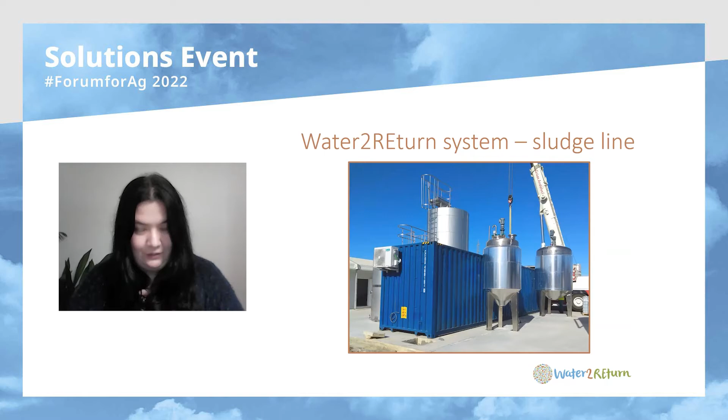This is the water line, the SVR, and the other different parts of the system, the filtration unit. Then here we have the fermentation unit, sludge line. And then here we have the energy recovery module with the anaerobic digester. And finally, as I was mentioning before, the algae line.

So just to finalize this presentation, which could be the potential clients for this project? We have two very differentiated sectors. On the one hand, those regarding the production of wastewater, which are in principle the slaughterhouse industry that would be the early adopters, because we have already been testing it in a slaughterhouse, and also the meat processing industry, because the wastewater is quite similar to the one from the slaughterhouses. Concentrations are not the same, obviously, but the kind of water is not so different.

And on the other hand, regarding agriculture, we have the agronomic products distributors and the agricultural sector, the farmers. As mentioned, it's a modular system to be tailored for further clients according to their needs and expectations. This means we do not have to install all lines in all cases. It depends on what the end user needs and expects. And it's highly replicable, because I was mentioning first the slaughtering industry and the meat processing industry, but it's flexible to be adapted to other food industries.

So that's all from my side.

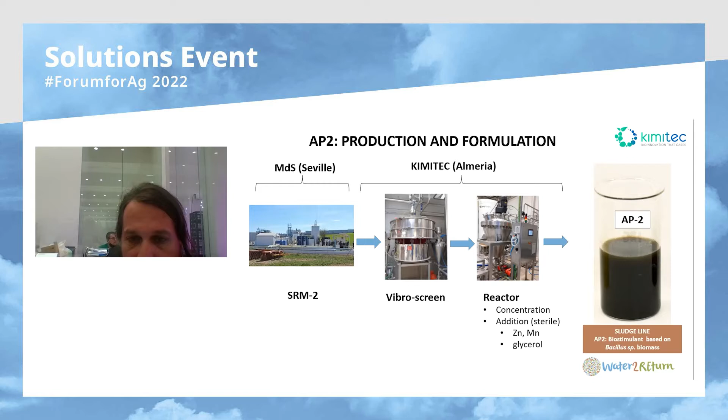And also with AP3, we follow a similar scheme. In this case, because of the size of the microalgae pool, what we do is send glycerol to them. Glycerol is going to reduce the water activity, which is a way to reduce the possibility of contamination. And we send IBCs - this is an IBC, this kind of container - filled with 300 kilograms of glycerol, in order to be completely filled with microalgae biomass.

Then we send this IBC already full to our facilities, and over there we screen it and pass all this biomass through a homogenizer in order to break down the cells and release the organic material inside these cells.

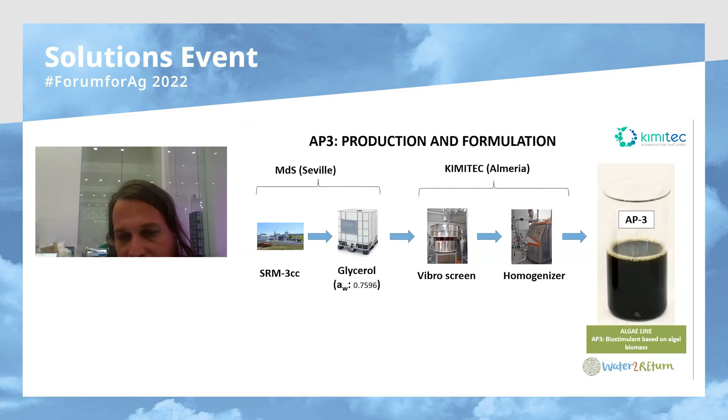So here you can see some tests we did. At the very beginning, what we did was some kind of scouting. We gave very close farmers 10 or 20 liters to try it with different crops and in different situations, with the idea to get feedback, because at the beginning we didn't know what we could use it for. Maybe for seed germination, for increasing the sugar in melon, for example, or we didn't know what to expect from this product.

So we sent a lot of samples to many close friend farmers, and we got some feedback.

Here you can see a test in which we try, in this case, AP2 against some control. In this case, Agrobiotic, which is a product of our company, Kimitec. And as you can see, in the commercial unit figure, product AP2 has a biostimulant activity, but it's not as good as our product Agrobiotic.

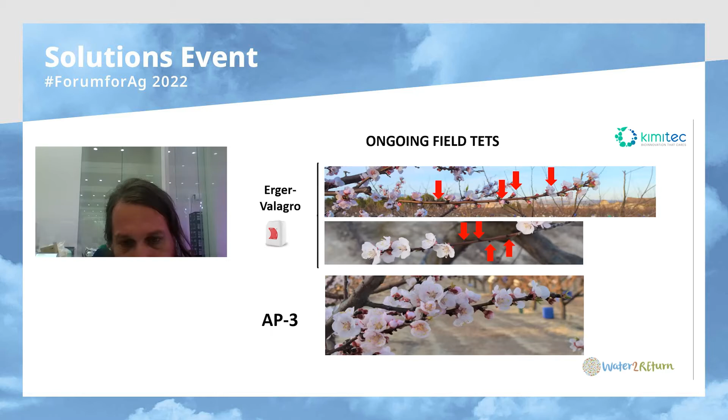If you get a more homogeneous fruit setting and flowering, you will get a more homogeneous production, and then you have to get into the field just once for manual picking. Here you can see another test, and in this figure you can see how our product AP3, at two different concentrations, increases the flowering activity and the fruit setting compared to the control.

I'm sorry if you are hearing a sound, it is raining a lot, and it was not planned to rain so much. Sorry.

And you can see our product AP3 is competitive with the chemical control. It's much better than the organic product from the competition, and it's competitive, even better than the chemical control. So that is it.

Thank you very much, David, for your presentation. We were able to hear you very clearly, despite the sound you mentioned in the background. But yes, thank you, it's always good to see the scientific side of things and the actual results.

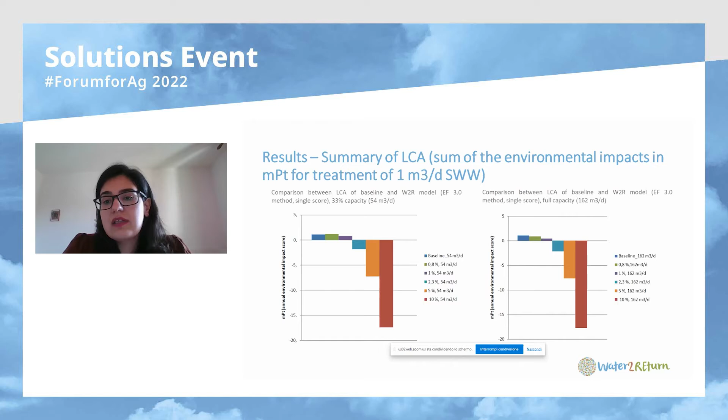And if we even increase this amount - 2.3, 5, 10% - we are really beneficial in terms of environmental impacts. On the right side, when we implement the same reduction percentages on chemical fertilizer consumption, we see very similar trends: first one representing baseline, second is the breaking point, we can think of them as catching each other. 1% reduction is already beneficial, and more than 1% it is extremely beneficial.

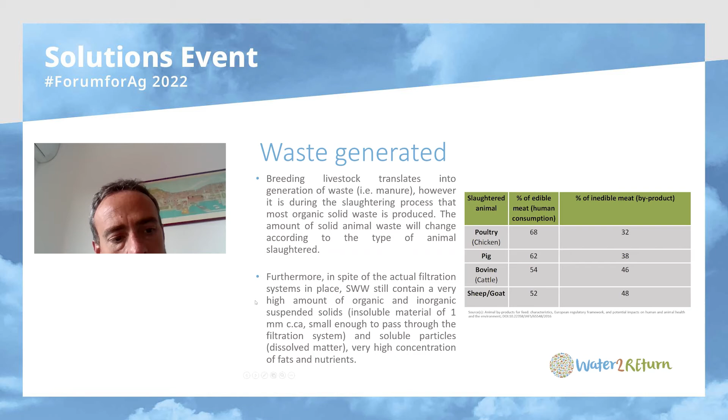If we focus our attention on the regulatory aspects, we have focused our attention on the Water Framework Directive, the Sludge Directive, and the EU Biodiversity for 2030 Directive, in order to develop a solution that in any case is aligned with the actual and future legislative framework defined by the European Commission.

About the first one, the Water Framework Directive is a European directive which requires European Union member states to achieve good quality and quantitative status of all water bodies. It stipulates that groundwater must achieve good quantitative status and good chemical status. As this document was written 20 years ago, Water2REturn far exceeds the requirements of this directive.

If we focus on the Sludge Directive, it was adopted 30 years ago, and the new directive is being written with both the needs of the environment as well as the needs of farmers in mind. Over 65 organizations, including Copa-Cogeca and Fertilizers Europe, have given feedback. The Water2REturn system fulfills the requirements of the previous Sludge Directive and should fulfill the upcoming directive.

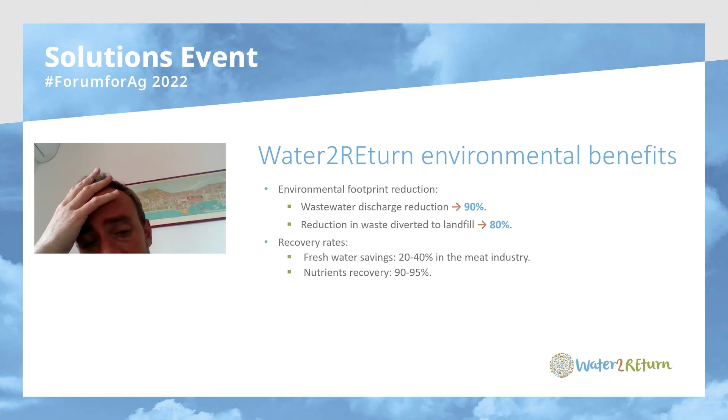In terms of recovery rates, we have freshwater savings of between 20 and 40% in the meat industry, which is an important result we have achieved, and we have nutrient recovery between 90 and 95%. Just to give you an idea about the treatment cost, with the conventional solution the cost is

2.63 euros per cubic meter of water. With our system, we are able to decrease this cost to 1.85 euros per cubic meter, a cost saving of around 30%. Of course this is an average value and depends on the different conditions of the slaughterhouse.

In terms of business opportunity for the involved sector, there are new opportunities for wastewater treatment, energy engineering, and consultant companies. We have new products for manufacturers of biostimulants, and for sure new opportunities for slaughterhouses and the meat industry in general.

Who are our potential clients? The slaughterhouse industry are the early adopters, in particular the meat processing industry. On the other side, we have bioagronomic product distributors, and for the agriculture sector we have conventional and organic farms.

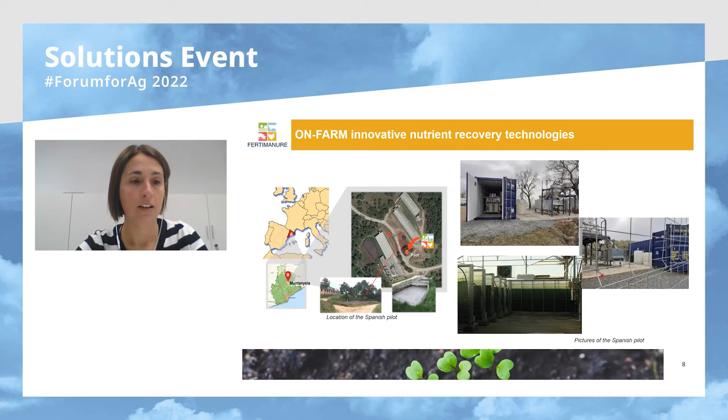The second pilot is located in the Netherlands, specifically at the Arjen Prinsen farm in the Achterhoek region. Arjen Prinsen is also a partner in our project, and in this pilot we have also involved Wageningen University and Research and Dorset Green Machines.

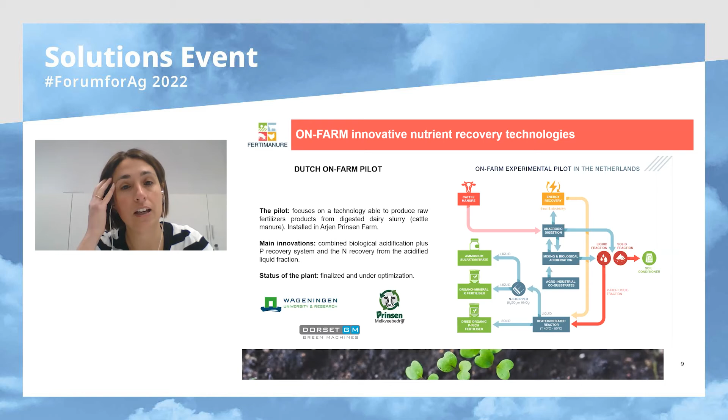This pilot is focused on the treatment of cattle manure, with a treatment capacity of 8 cubic meters per day. The main innovations are combining a biological acidification and phosphorus recovery system with nitrogen recovery from the acidified liquid fraction. This pilot, differently from the one in Spain, also includes anaerobic digestion.

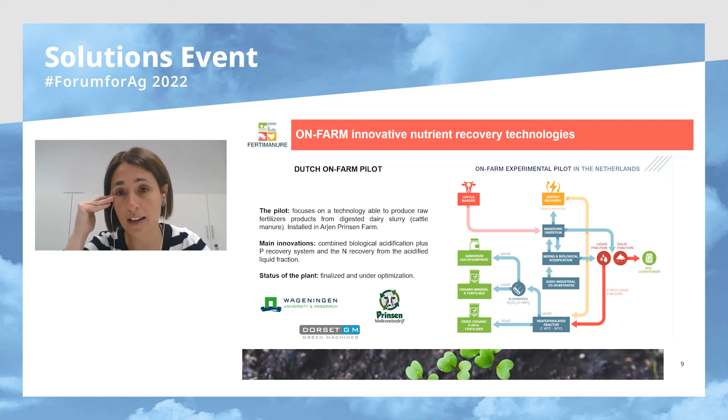Then we have the German on-farm pilot, located at the Fraunhofer facilities. Fraunhofer is the only partner involved in this pilot, which is aimed at valorizing cattle manure. The main innovations of the German pilot are the catalytic reforming of the manure with zeolite, a selective ammonium recovery directly from a thermocatalytic reforming gas stream, the phosphoric acid leaching of the thermocatalytic reforming biochar, and the exchange reaction to produce solid ammonium phosphate.

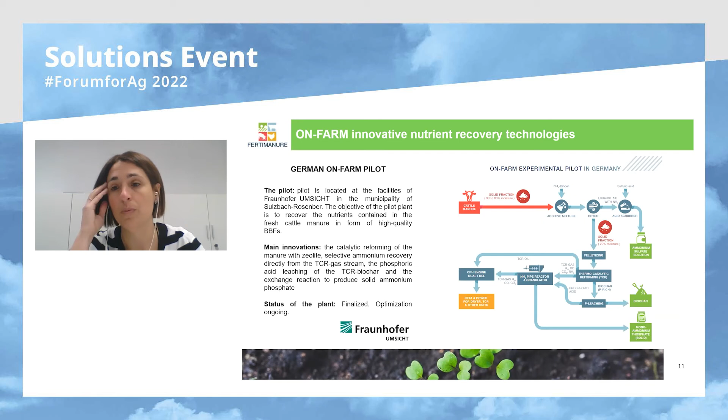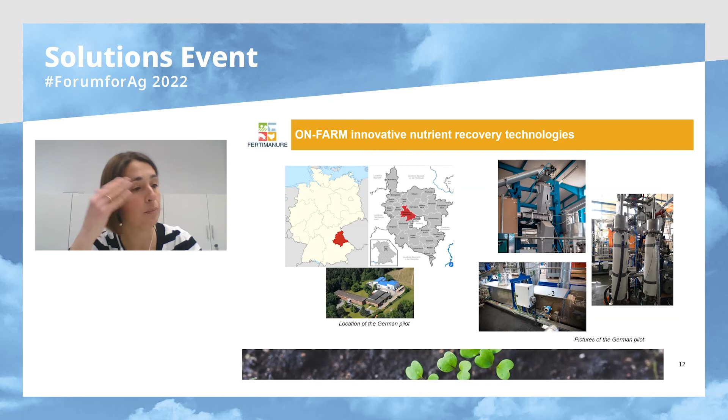In this pilot we are obtaining 3 different products: a solution of ammonium sulfate, the biochar, and the monoammonium phosphate, which is a solid product. Here is the location of the German pilot, and also some pictures of this pilot plant, which has a treatment capacity of around 3 cubic meters per day.

Here is the case of the Belgian on-farm pilot. The main partner involved is Ghent University, which is doing the follow-up of products obtained in different already existing plants in Belgium, although they are doing a more detailed analysis and balance of a pilot located at Detricon, on a farm that has 11,000 pigs.

The main innovations of the Belgian pilot are the secondary ammonium sources obtained from stripping and scrubbing technologies, used to recover ammonium fertilizers. This pilot is operational, but our Belgian partners will also be analyzing bio-based fertilizers obtained in other already existing pilots on different farms, to follow up on product quality and test these bio-based fertilizers obtained in this case from pig slurry.

Here is the location of this Detricon plant that will be followed in more detail, and also some pictures of this Belgian pilot.

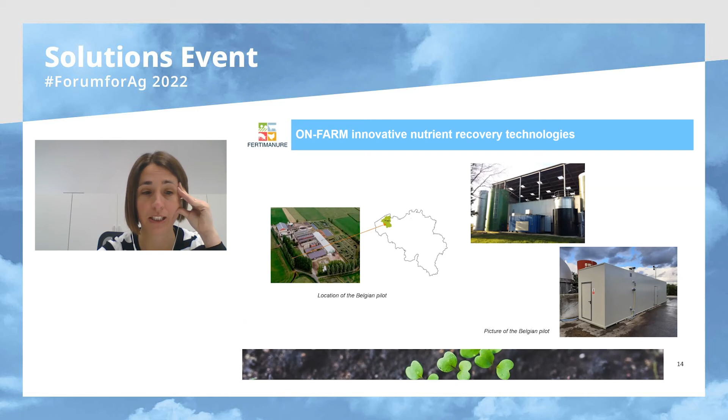And the last one, the 5th pilot, is the one in France. In this case, the French pilot will run using on-farm mobile units. We have mobile pilots that have been built into trucks, and in this way we will be able to use them in different farms located in the Grand Est and Brittany French regions.

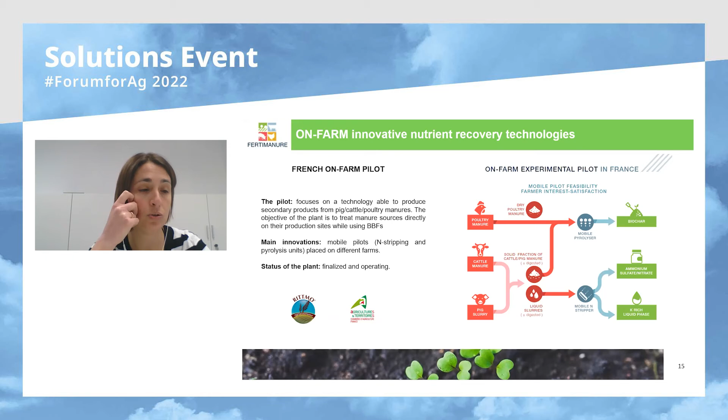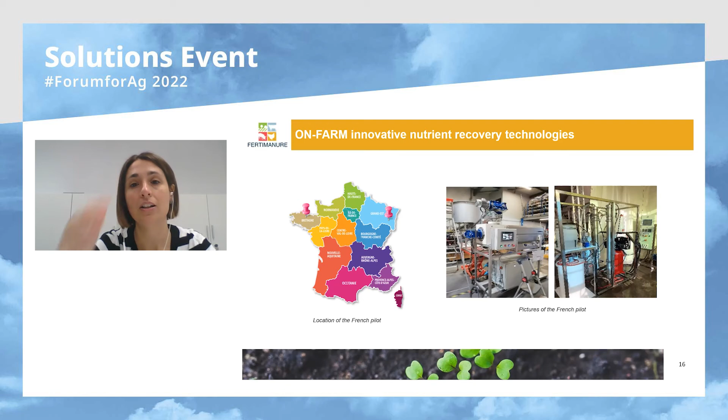As you can see, these are different approaches. We have 5 different pilots using completely different technologies with different approaches, treating different types of livestock waste. At the end, if we put together all the work done in the different on-farm pilots of the FertiManure project, we are obtaining a total of 19 bio-based fertilizers. As I said, the bio-based fertilizers are the products, the nutrients directly recovered from the pilots in the farms. Here you have the list of products that we are obtaining, and also some pictures of these products.

What we are doing with these products is to directly test them, but also we are using these products to formulate tailor-made fertilizers. So how are we working to obtain these tailor-made fertilizers? What we have done is to create the TMF Nutrition Tool. The TMF Nutrition Tool is an Excel tool that is aiming to be easily used by all the farmers and stakeholders that can be interested in formulating tailor-made fertilizers.

This tool is considering the sources that we are using to obtain the nutrients, so the manure fractions, also the nutrients that have been recovered from the different pilots, and other additives to formulate and to have the desired nutrient content. We are also considering the soil and crop requirements: which crop are we willing to use these fertilizers for, in which soil do we have these crops, and also possible legal restrictions of the region where this TMF will be applied, in order to have clear which are the limit nutrient contents of these products.

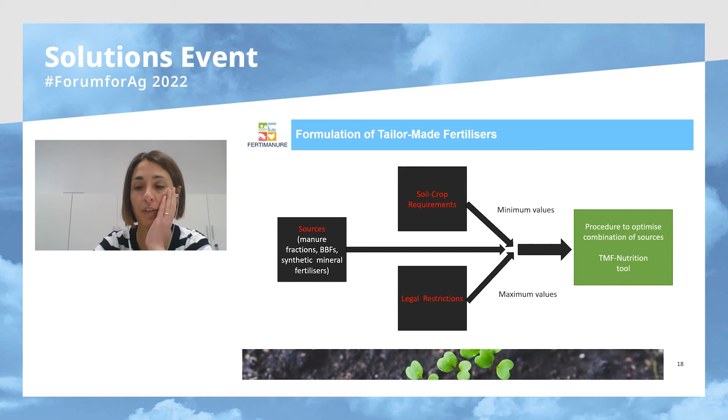Also, once we have the BBFs and the TMFs, what we are doing in the project is to test their agronomic performance and compare them with current mineral fertilizers that are currently used. We are doing tests in control conditions, at lab scale, where we are assessing nitrogen, phosphorus, and carbon dynamics of our products compared with the mineral fertilizers. Then we are also doing field trials to evaluate in a real scenario the performance of our products, and we will also be doing demonstration field sites and interactive events to show the stakeholders our products.

At the moment we are doing the field trials and the pot tests and incubation tests, and for the moment what we are seeing is that our products have the same quality, so no major differences are seen between using our products and the commercial ones. In terms of agronomic performance, for the moment the results are good, and we are obtaining no difference between our products and the commercial ones.

Another important thing will be to evaluate the sustainability of obtaining these products, implementing these technologies, and applying our products in the field. So we are doing a complete environmental, sustainability assessment, considering the environmental, economic, and social parts, following a cradle-to-grave approach, considering all that is done on the farm, in the production of tailor-made fertilizers, and in the application of these products. Thanks to this assessment, we will be able to tell the benefits of our process from an environmental, economic, and social point of view.

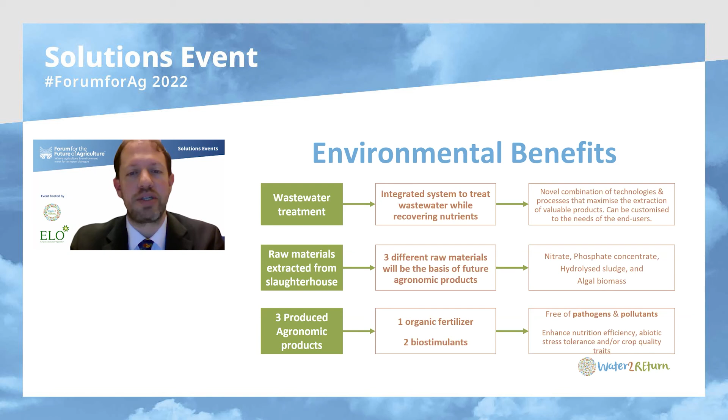These are the 3 agronomic products: 1 fertilizer and 2 biostimulants. The fertilizer is a soluble nitrogen and phosphorus product, which we call SRM1. The biostimulants are the hydrolyzed sludge, enhancing nutrient efficiency, abiotic stress tolerance, and crop quality traits, as well as algal biomass, SRM3, which is an algal-based biostimulant.

But most important are the environmental benefits of Water2REturn: these products are free of pathogens, heavy metals, and emerging pollutants. This gives safe reuse of slaughterhouse wastewater in the EU as well as abroad, if the product fertilizers are exported.

Also, as mentioned during the previous presentation by Marco, it's still inexpensive, still makes other fertilizers cheaper, and it's still in line with all existing legislation. And the final part of the presentation is the economic security.

As you've been seeing, the situation in Russia has jolted the fertilizer market. The Russian-Ukraine crisis ignites fertilizer prices at a critical time for world crops. CF Industries boosts U.S. fertilizer shipments as war cuts Russian exports. And of course, the Russian invasion of the country known as the breadbasket of Europe has exposed just how much the EU relies on Russian fertilizer and Ukrainian corn to feed its animals.

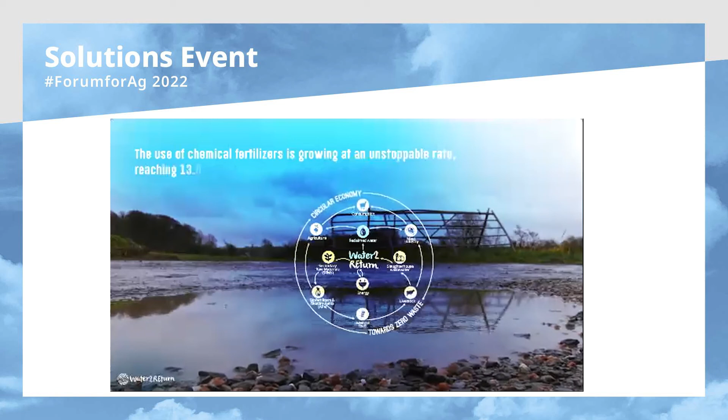The purpose of the Water2REturn project is the recovery and recycling of nutrients within the framework of circular economy, embodied in the implementation of an integrated solution for the treatment of wastewater from slaughterhouses, as well as the recovery of nutrients with a high market value in the agricultural sector. Industrial slaughterhouses are noted for a high consumption of water and energy, as well as for generating vast amounts of wastewater. These wastewaters contain a huge amount of nutrients, and the tendency is to treat them and dispose of them, instead of using methods for their recovery.

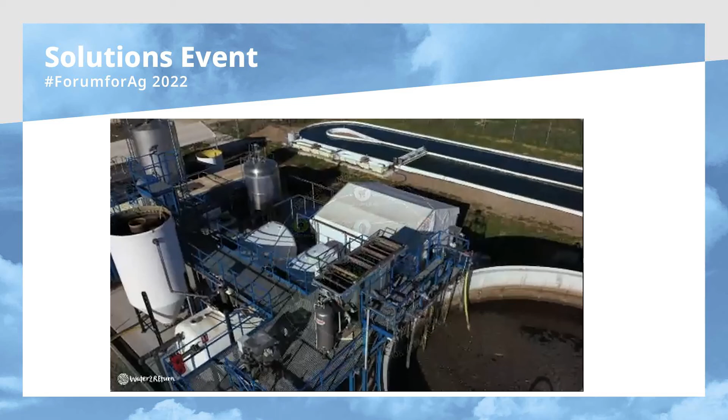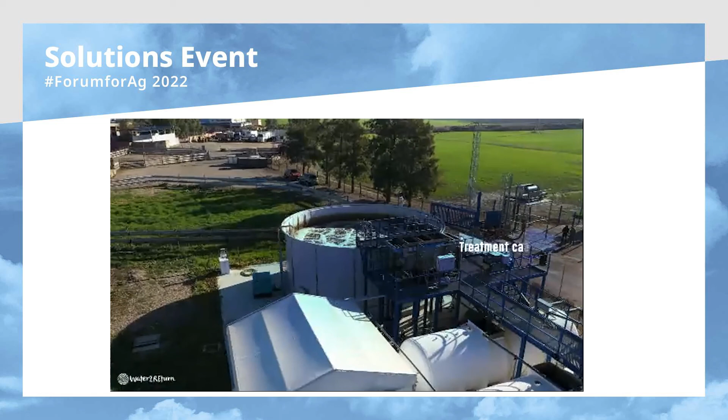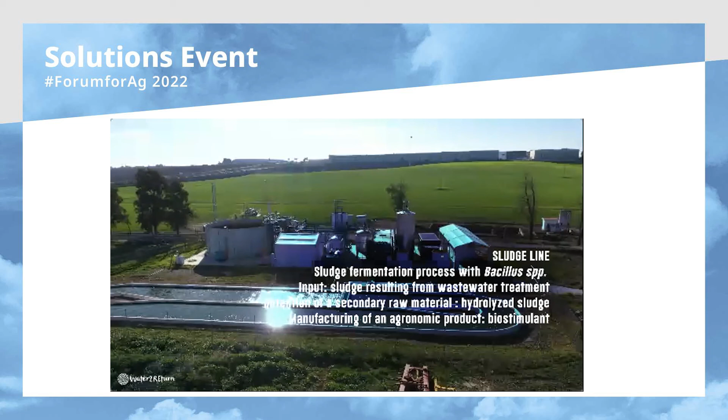On the other hand, the use of chemical fertilizers is ever increasing due to the need to feed a growing global population under limited availability of farming land, with all the ensuing environmental implications like eutrophication of masses of water. Water2REturn proposes an alternative, sustainable approach, a real technological breakthrough developed within the framework of a circular economy. Water2REturn is a system that allows wastewater from slaughterhouses to be treated whilst also recovering the nutrients, thus becoming secondary raw materials used to manufacture agronomic products, specifically fertilizer and two biostimulants. In addition, the system includes an energy recovery unit. Ultimately, slaughterhouse wastewater treatment facilities become biorefineries.

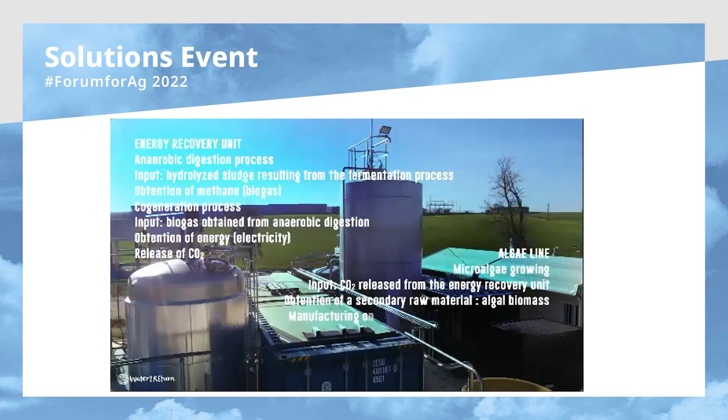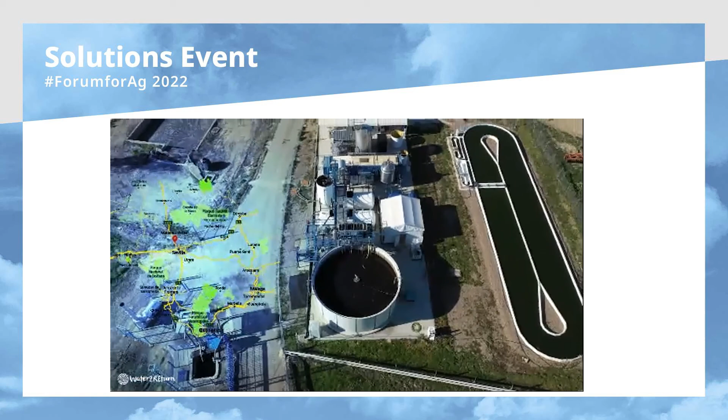The Water2REturn demonstrator unit is installed at the Matadero del Sur in the Sevillian town of Salteras, Andalusia, Spain, treating 50 cubic meters of the daily flow of 150 cubic meters produced by the slaughterhouse, and can be a scalable and reproducible system according to user needs. The Water2REturn system also represents a new business model within the framework of circular economy, opening up opportunities over several industries, such as water treatment, consultancy, distributors of agricultural and agronomic produce, amongst others.

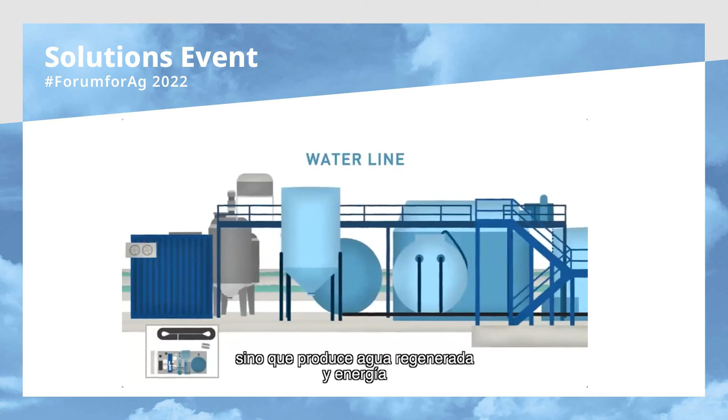This integrated system not only treats wastewater but generates reclaimed water as well as energy thanks to its energy recovery module. It also extracts resources to be further turned into high market value products for the agrochemical industry.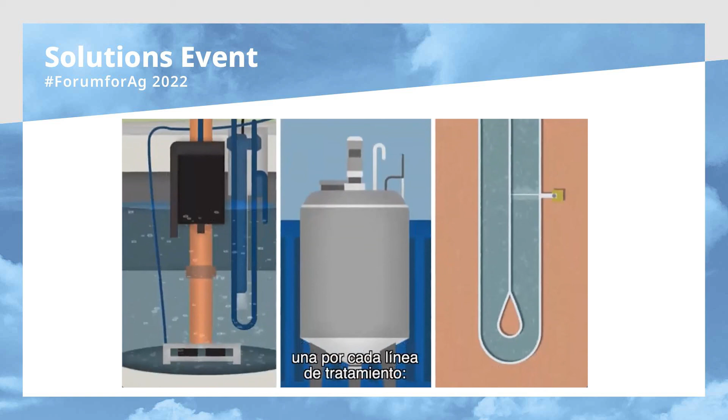Concretely, per each of its treatment lines, the system recovers 3 different secondary raw materials: nutrient concentrate, hydrolyzed sludge, and algae biomass. These form the basis to further manufacture agronomic products, 1 biofertilizer and 2 biostimulants, ready to be used by the agricultural sector.

This way, the Water2REturn approach not only contributes to reducing the production of chemical fertilizers that may cause environmental problems, but also solves wastewater management issues in slaughterhouses while reducing water and energy costs at the same time. Water2REturn's innovative, resource-oriented solution for industrial wastewater treatment is transposable to the needs of diverse industries and end users. It responds to a rising demand for sustainable alternatives, increasing water use efficiency and resource recovery, making it an optimal framework across Europe.